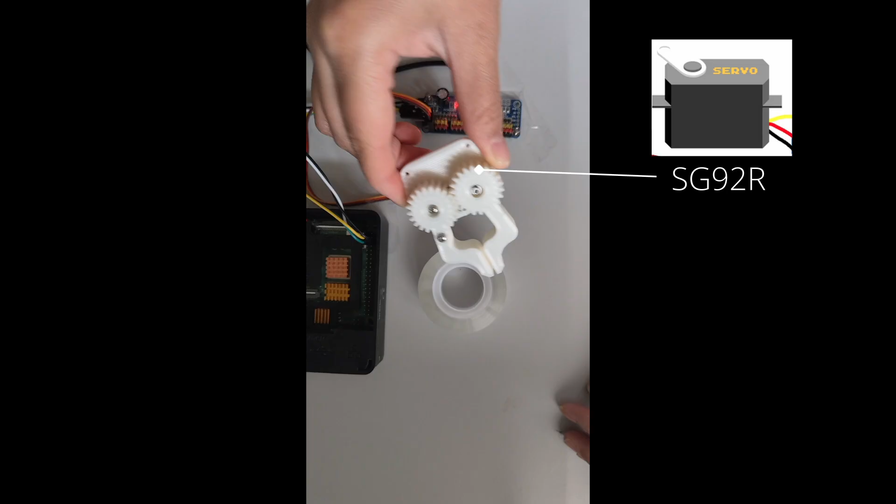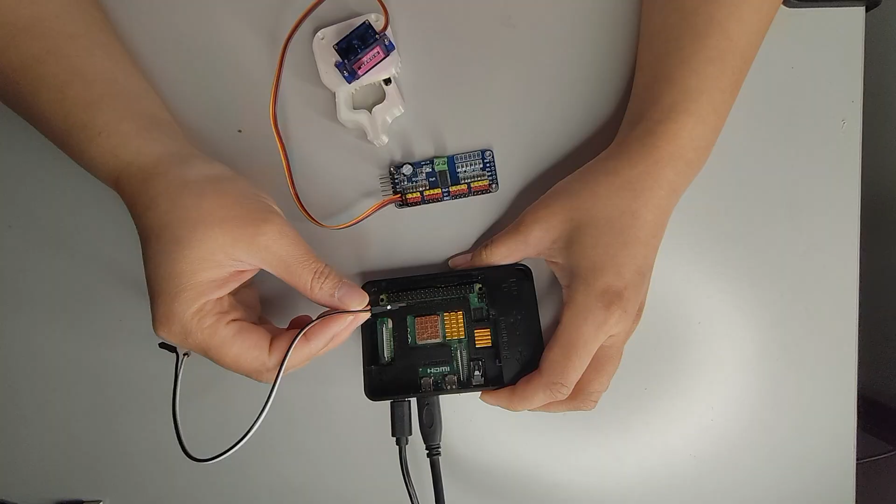I built this super simple robotic gripper, meant for beginners to learn about robotics and motion control. The best part is you can build one at home, even if you've never built a robot before. This is my DIY robotic gripper—it runs on a servo motor controlled by a Raspberry Pi, with 3D printed gears doing the heavy lifting. In this video, I'll show you how to design, print, wire, and code the whole thing, and we'll test it on some very scientific objects, like my super rubber duck. Alright, let's build this thing step by step. Feel free to pause anytime and follow along.

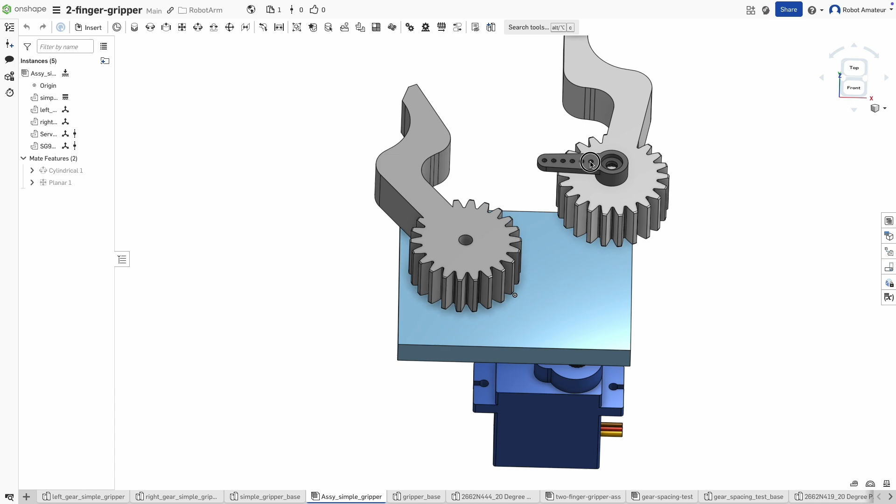I wanted to make a really simple gripper, something beginners can easily build to get started with robotics. To keep things straightforward, I went with a direct drive setup using an SG92R servo motor—one of my favorite servo motors for small projects.

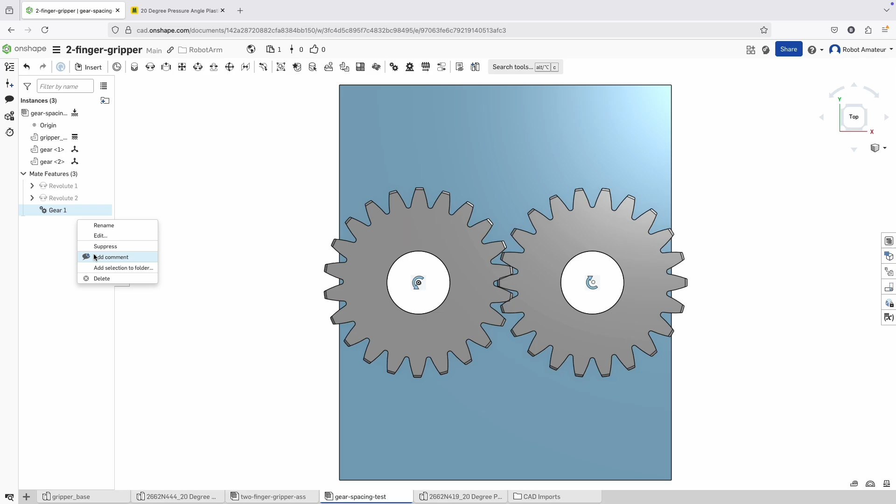For designing the gripper mechanism, I grabbed a basic plastic gear model from the McMaster-Carr website, then added a small finger shape onto it. The key is making sure the right gear rotates relative to the left one so the teeth match properly. For the pivot axis, I used a screw as the shaft for the left gear, and for the right one, I connect the printed gear directly onto the servo motor shaft. Both are mounted on a simple base plate.

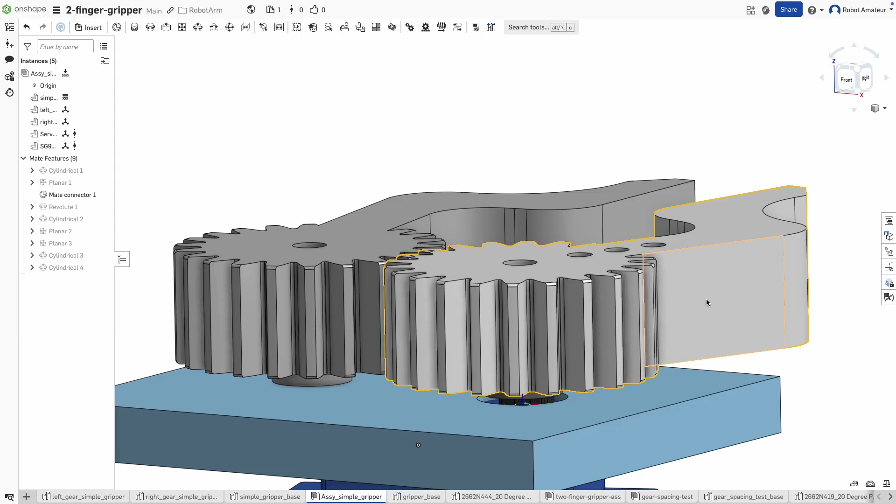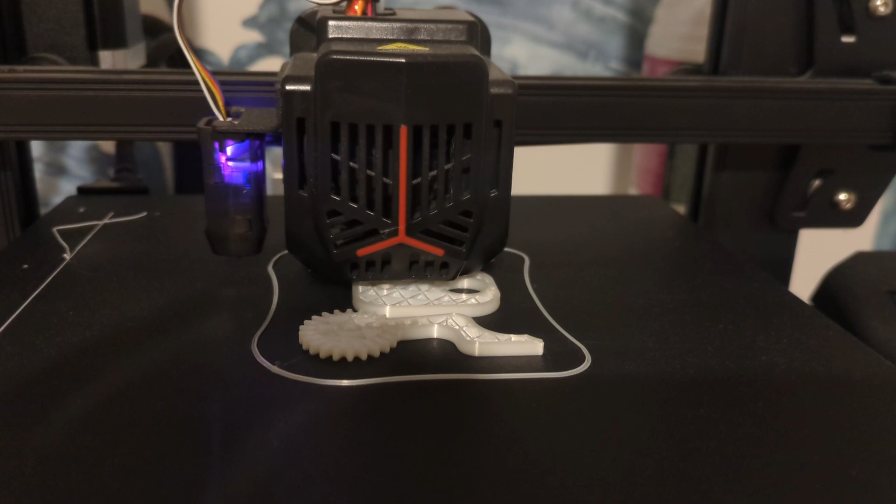Mechanical design rarely works perfectly the first time, and that's totally fine. What matters is starting, testing, and improving. That's why 3D printing is perfect for projects like this—it's very quick to prototype, very quick to fix, and you can keep improving.

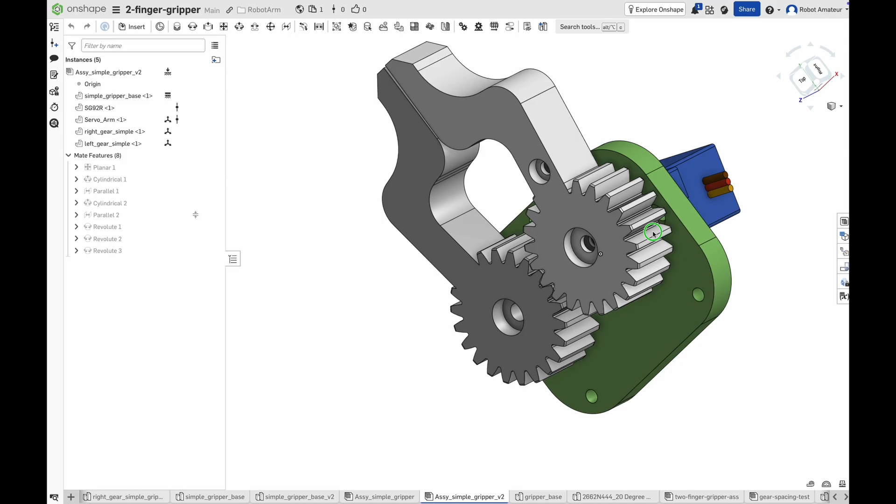Once the design is ready, it's time to 3D print the gears and the base. I designed everything in Onshape, and you can grab the parts straight from their website, or download the STL files using the link in the description below. Feel free to reuse and adapt the design to your needs—maybe tweak the size or change the shape to fit the objects you want to grasp. That's the fun part of building stuff like this.

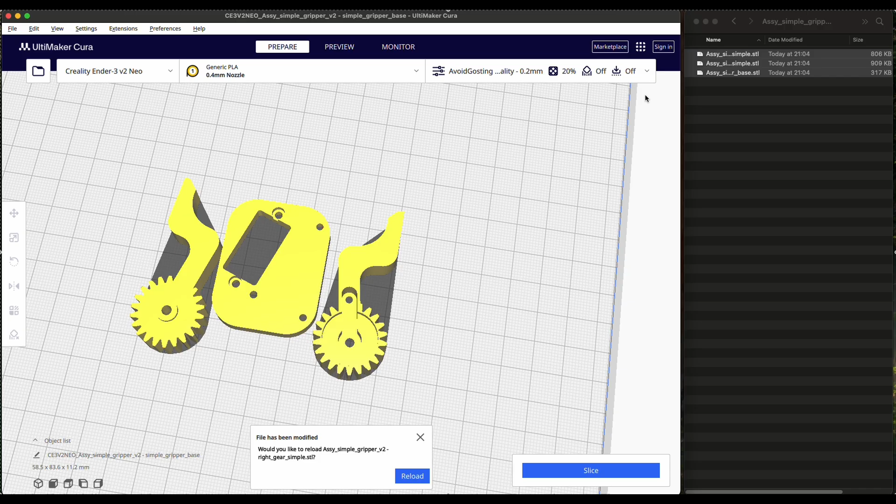Once you've got the STL files, open them in your 3D printing slicer. I'm using Ultimaker Cura for slicing, and my 3D printer is a Creality Ender-3 V2 Neo. If you'd like me to dive deeper into 3D printing basics, just drop a comment below. After slicing, save the G-code to your SD card, put the card in the printer, and you're ready to go. Alright, let's start the print.

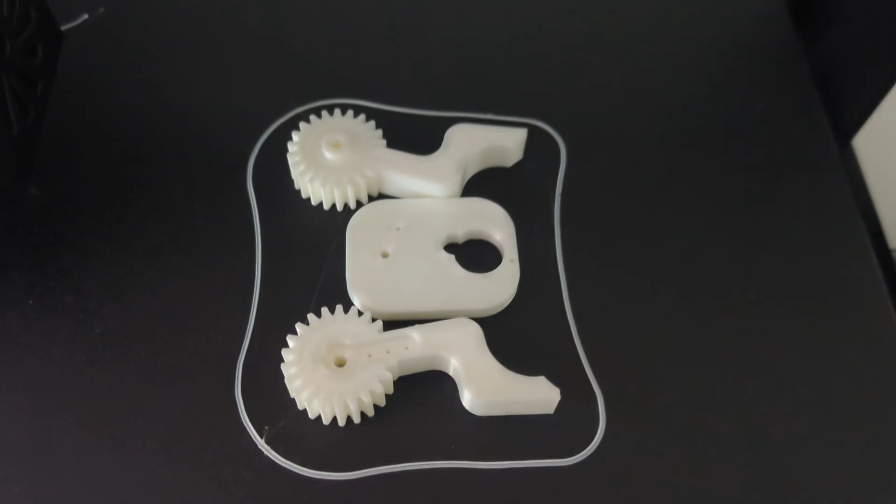That's everything you need to start putting it together. Here are the printed parts—they turned out pretty nice. Now let's go ahead and start assembling the gripper.

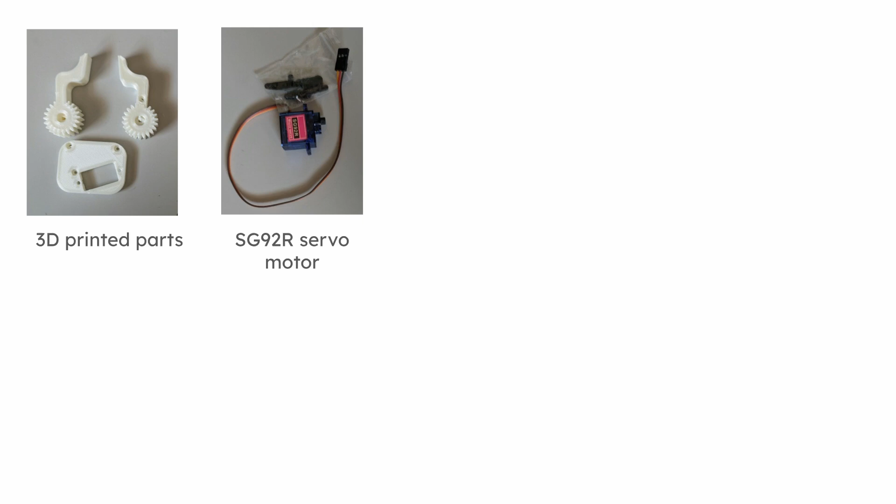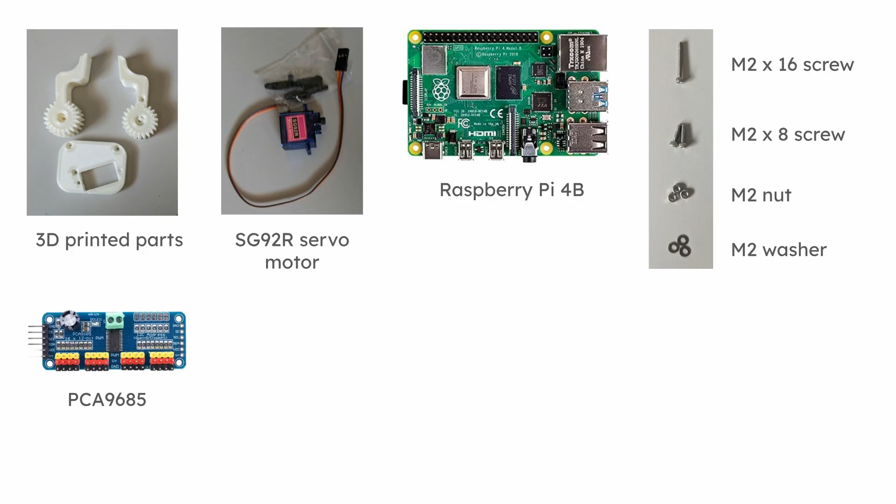First, the essential parts are the 3D printed pieces for the gripper mechanism. We'll also use an SG92R servo motor to drive the gripper. The brain of this project is the Raspberry Pi 4B. We'll use a PCA9685 module to control the servo motor with the Raspberry Pi. We'll also need some hardware, especially M2 screws, nuts, and washers for assembly. To help with assembly, we'll need a screwdriver and an Allen key. Finally, we'll need some jumper wires to connect the components.

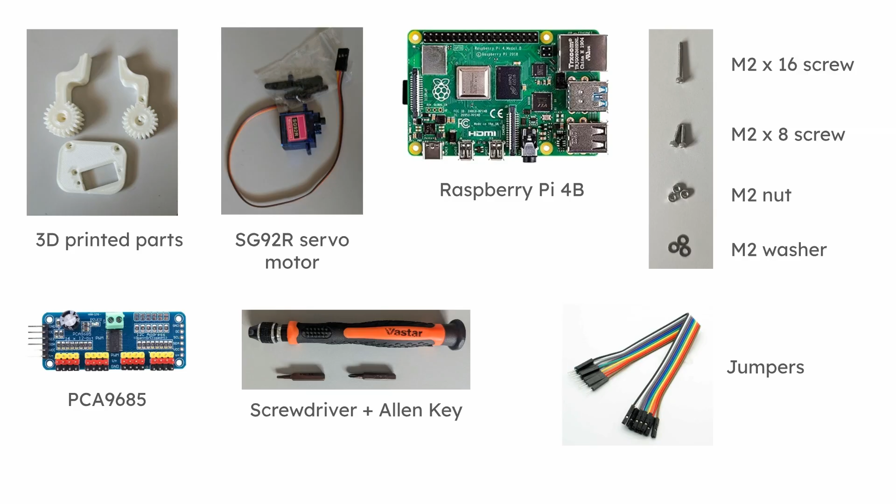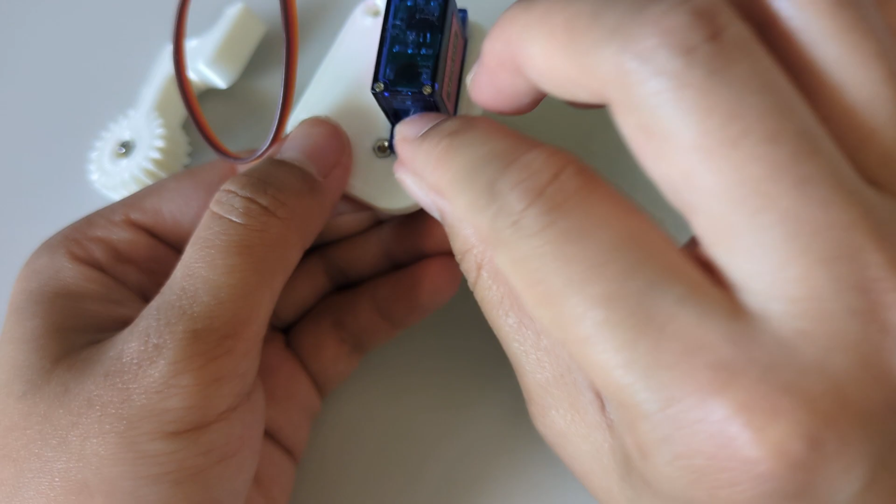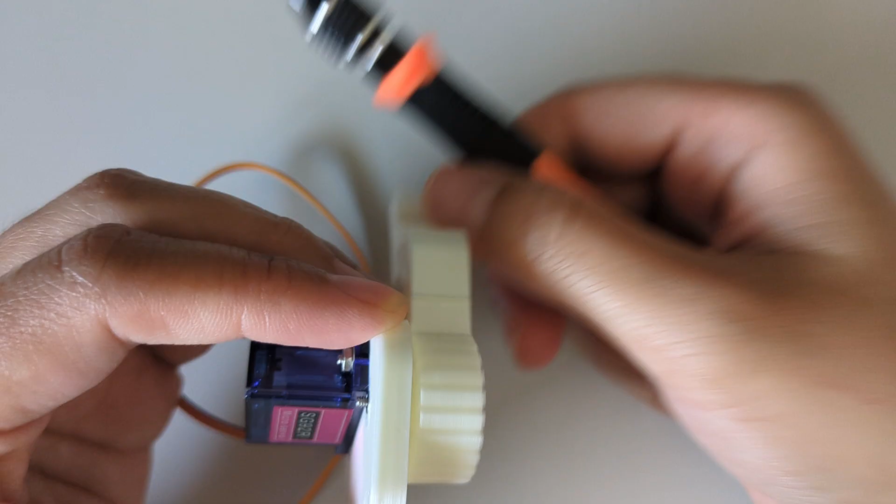To start assembling, first place the nut into the slot on the motor base. This is very important because later the hole will be very hard to access due to the servo body. Then mount the servo motor onto the base using two M2 by 8 screws—feel free to go back to the CAD drawing to get the right orientation. Then attach the left finger with the M2 by 16 screw. Try not to tighten this screw too much; the gear should be able to spin freely, otherwise too much friction may overheat the servo.

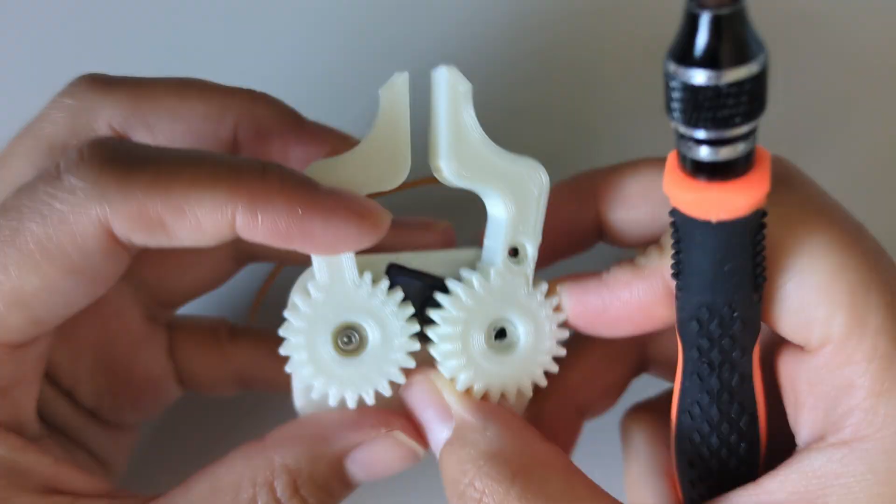After, I put the motor shaft in the right finger, and I attach the right finger using 2 screws provided by the servo motor. Make sure to put the nut into the motor base first. That's really important—once the servo is mounted, it's almost impossible to fit the nut into place afterwards. Now the assembly is done.

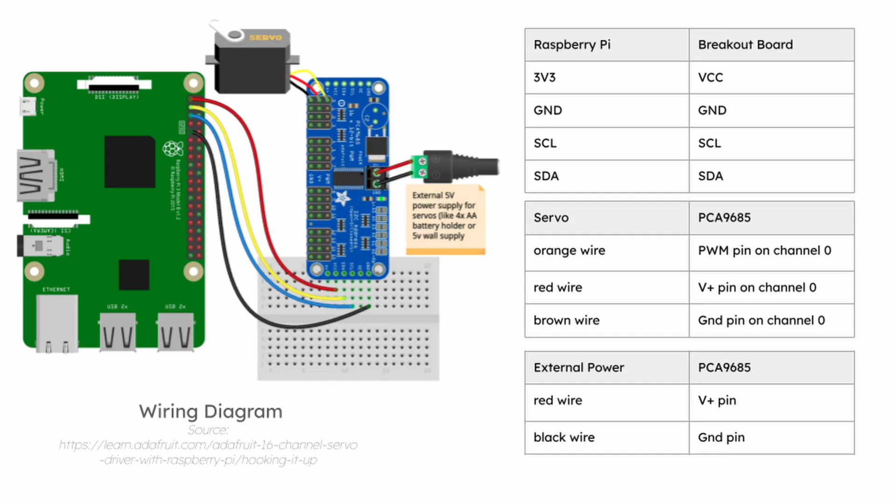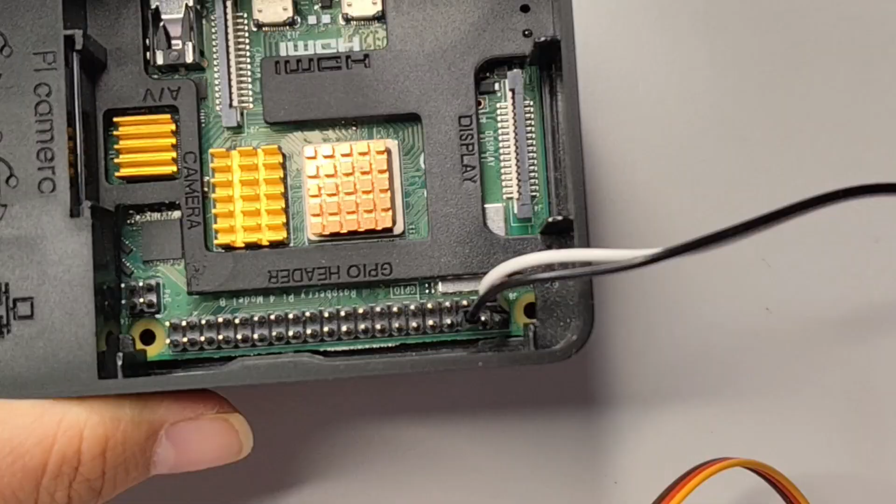Let's wire everything up. You'll find the wiring diagram in the description below. First, I connected the servo motor to the PCA9685 motor driver board by plugging in the 3 servo wires: orange to PWM0, red to V+, and brown to ground. Next, I connected the Raspberry Pi to the motor driver board using 4 jumper wires: 3.3 volt to VCC, ground to ground, SCL to SCL, and SDA to SDA.

Finally, I connected the external power supply to the motor driver board with 2 wires. This step is super important. Without external power, the servos can draw too much current, and this may cause a brownout, which might crash or even damage your Raspberry Pi.

For this project, I'm using Raspberry Pi instead of Arduino because it gives me more flexibility. It can easily interface with a wide range of actuators and sensors, including servo motors and RGB cameras.

Once everything's wired up, we just need to make sure I2C is turned on in the Raspberry Pi. I did it through Pi's desktop settings. It's super easy—just open Raspberry Pi configuration from the main menu, head over to the interface tab, and switch I2C to be enabled. After that, give your Pi a quick reboot and you're good to go.

Next, let's make a folder for your servo control code. Inside that folder, create a new Python file. You can just grab the example code from the link in the description—it's a simple script that uses the Adafruit library to control the servo.

I'm using Thonny editor, but feel free to use whatever works best for you. I like it because it's clean, easy to debug, and perfect for small projects like this.

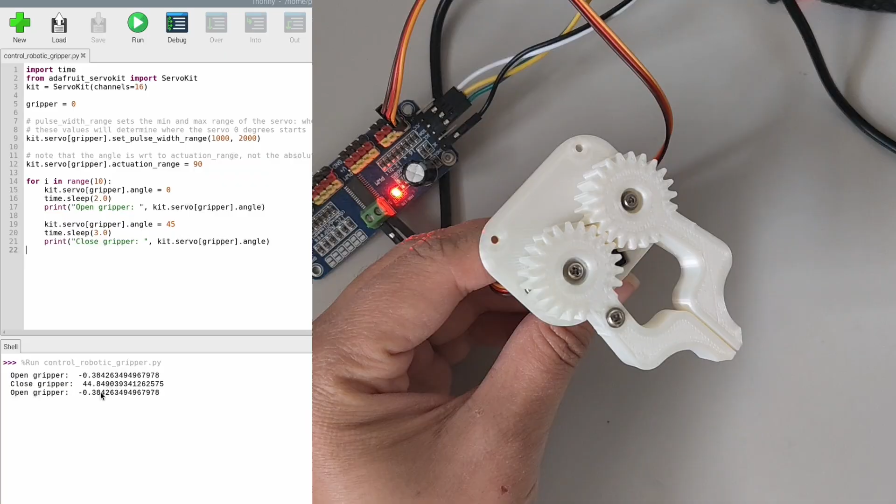Once your code is ready, just hit the play button. This code makes a servo gripper open and close again and again. A servo is a small motor that can move to specific positions, like 0 degrees or 45 degrees.

First, in this code, we import the time and servo libraries. Then we create a servo controller with 16 channels. We choose channel 0 for this gripper because that's how we wired it up. After that, we calibrate the servo so that it moves correctly. Finally, the program opens the gripper, waits, then closes it, waits again, and repeats this about 10 times.

When you run this for the first time, it's not going to work directly. The gear rotation may be blocked. You can even feel the servo motor heat up if it lasts too long, or it may make crazy noise like this. This is because the range values of PWM and the servo angle commands are not properly set.

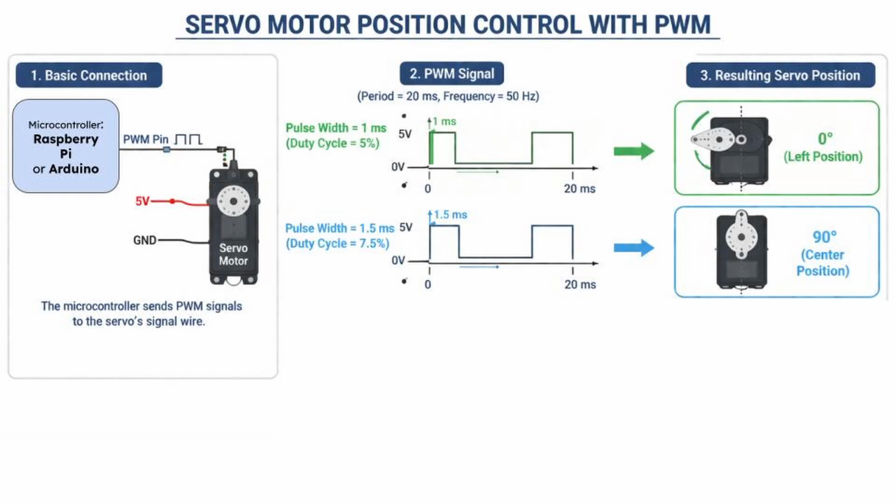PWM is like a message sent to the servo. The message is not the angle itself, but the pulse width. A shorter pulse moves the servo to one side, a longer pulse moves it to the other side. We must calibrate those values so the mechanical gripper positions match the code.

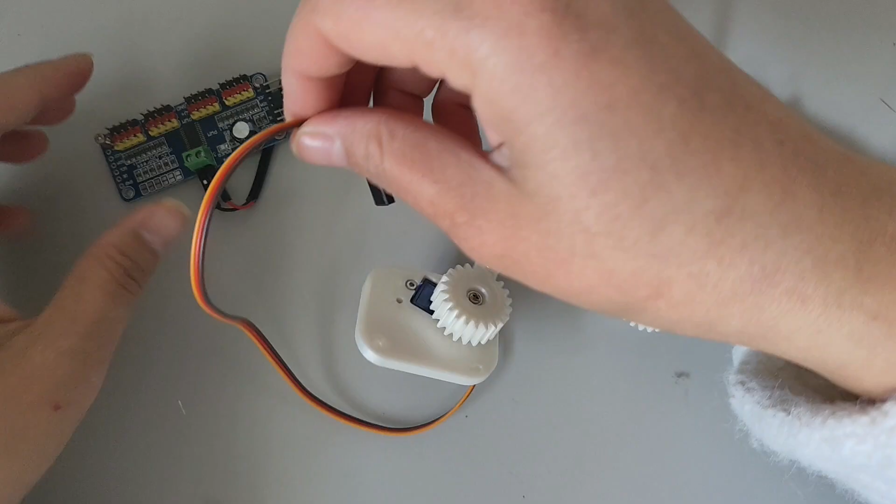So, how do I calibrate a servo motor? First, I unscrew the left finger so the right finger can move freely. That way, the servo doesn't get blocked and overheat. Then I test the 0 degree and 90 degree positions of the right finger to understand the starting point and the full range of motion.

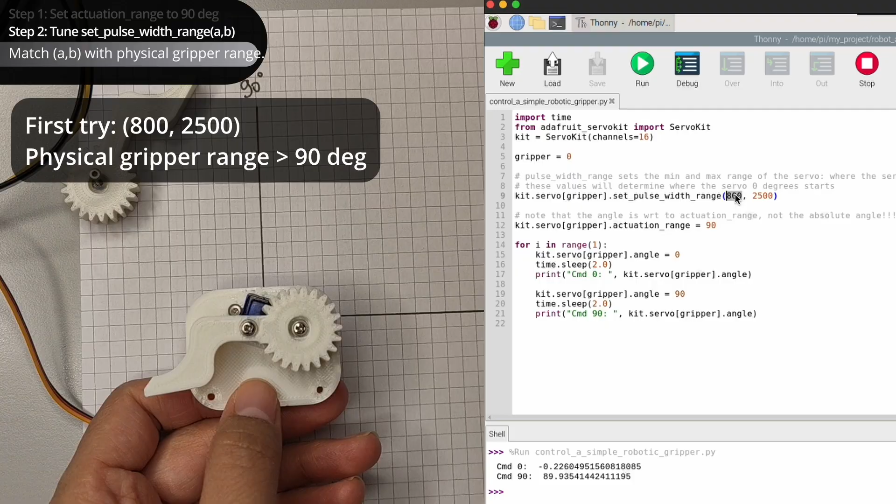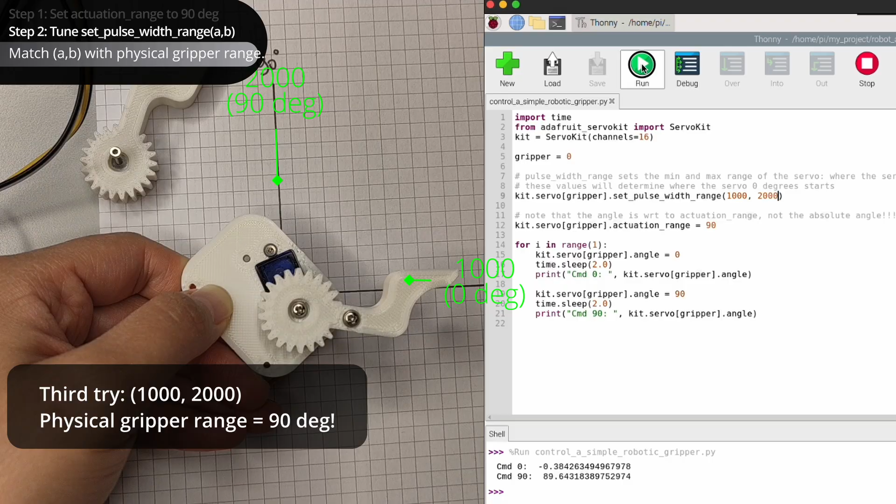From there, I can adjust the pulse width values to fine-tune how far the gripper opens and closes. Once I've found the right range, I unscrew the right finger and set it to the 0 position. Then I do one last test to check the gripper's open and close positions.

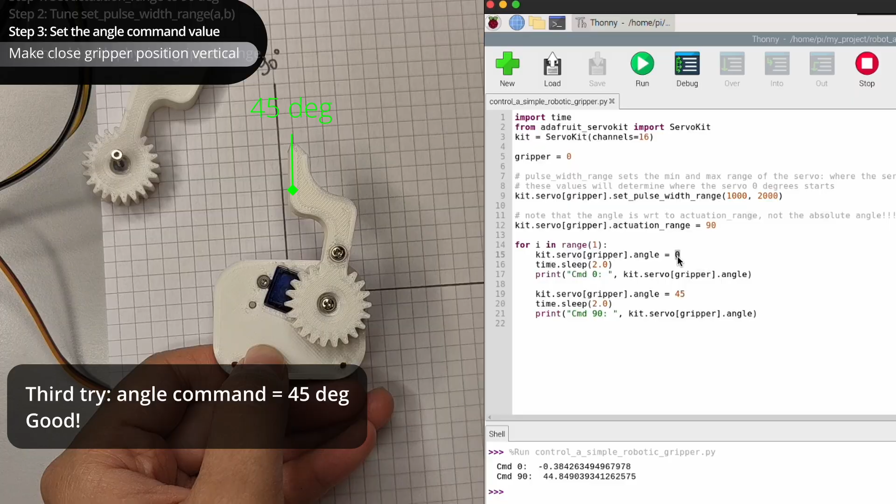By adjusting the angle value, I found that 45 degrees is the closed position for my gripper, and 0 degrees is the fully open position. That might be different for your build depending on how you mounted the fingers. Finally, I screw the left finger back in place, and there we go—it works!